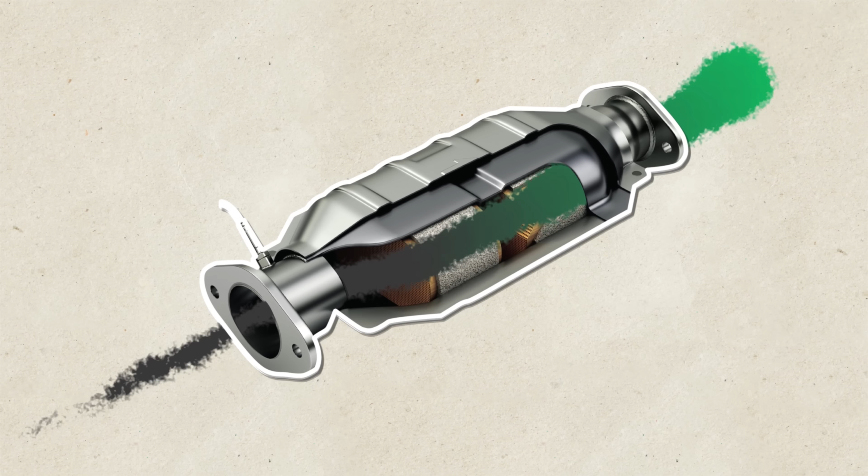It would take another 40 years before engineer Eugene Houdry invented the catalytic converter, which reduced the problem of toxic gases. Later in the video, we'll look at Eugene's story too. Without these two men, noise and air pollution caused by motor vehicles would be much worse than it is today.

Now you're probably aware of the dangers of toxic gases like carbon monoxide that your car releases. But you might consider noise less of a danger. The truth is, noise kills. Loud noise at work and consistent traffic noise makes the risk of heart disease 4 times higher.

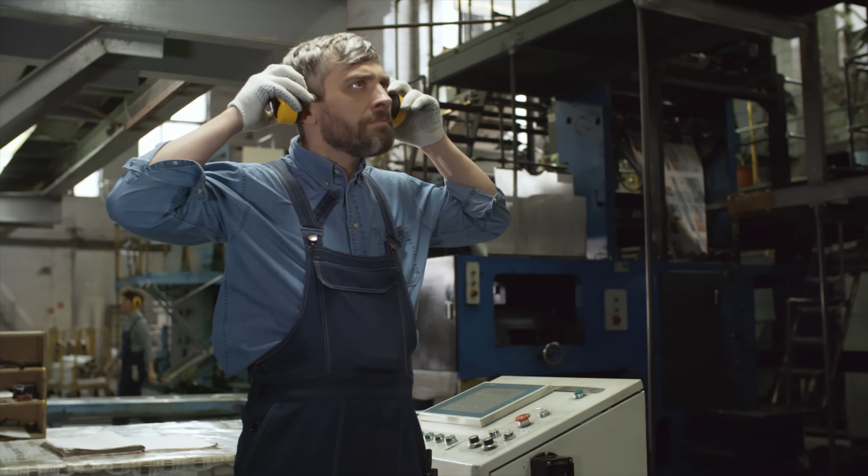This is why protective hearing gear is required by law. It's also why states impose noise regulations. This goes back as far as 1905, when the state of Oregon passed a law that required vehicles to have a light, a muffler, and efficient brakes.

Today, most states don't allow exhaust noise of over 90 decibels. In general, anything over 85 decibels is too high. Normal conversation is around 60 decibels, except for mine, which is a lot louder. A lawnmower is about 90 decibels, and a rock concert gets up to 120 decibels.

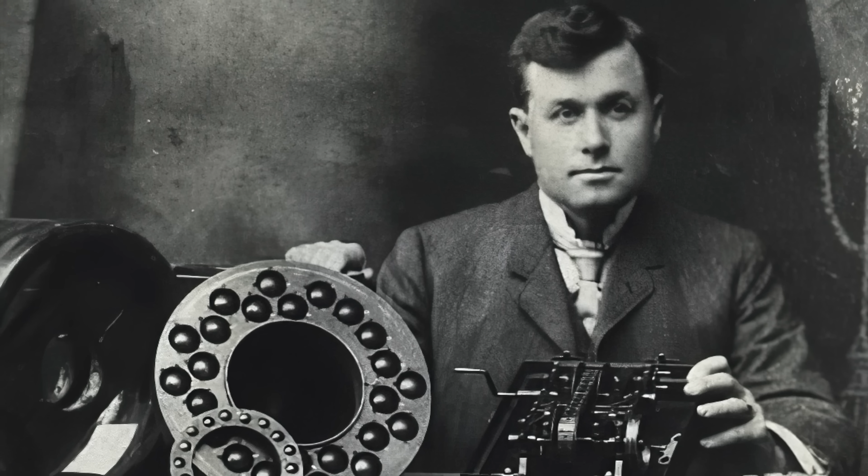Some people can handle loud sounds better than others. I'm guessing Milton Reeves wasn't one of those people. So let's hear the story of how he came up with the muffler. It wasn't just the muffler he invented—we'll take a look at his other inventions too, as well as some of the strange-looking cars he built.

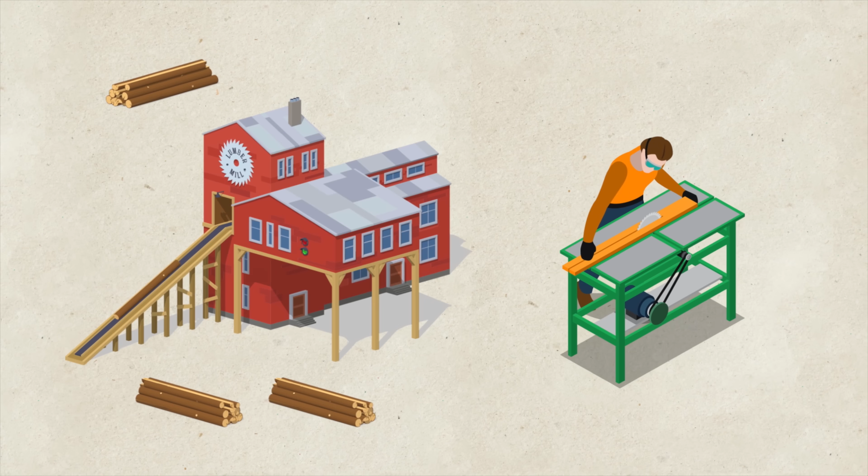It's 1864. Milton Reeves is born on a farm in Rush County, Indiana. At just 15 years old, Milton is working at a sawmill when he notices that the workers can't control the speed of the pulleys used to power the saws. Milton is a perfectionist, so he spends months studying and experimenting until he finally comes up with a solution. He invents variable speed transmissions to control the speed of the pulleys.

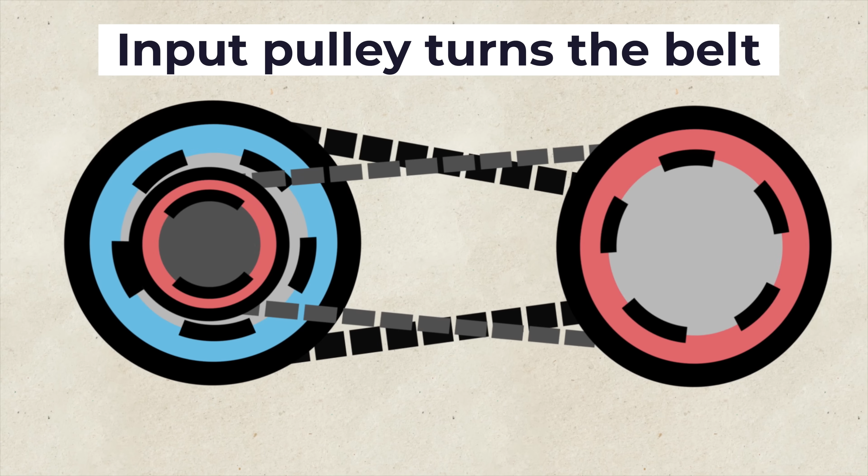Basically, continuous variable speed transmission works by attaching a belt to 2 pulleys. The input pulley turns the belt, which in turn pulls the output pulley. If you adjust the gap between the pulleys, this changes the diameter, which changes the speed of the belt.

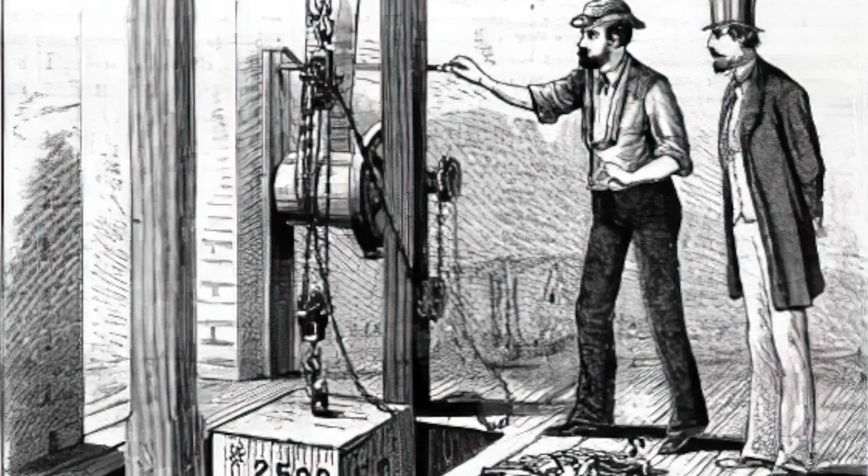This idea is so good that 10 years later, Milton and his brothers purchase a pulley company. By now, Milton is interested in motor vehicles. He uses his belt and pulley-based variable speed transmission on the first 4-wheeled Motocycle that he built. The first recorded test is September 1896, just 4 months after Henry Ford completed his quadricycle in his home workshop in Detroit. Milton's automobile is either the 4th or 5th American automobile built. He believes his vehicle is superior to Henry Ford's quadricycle, which only has 1 speed.

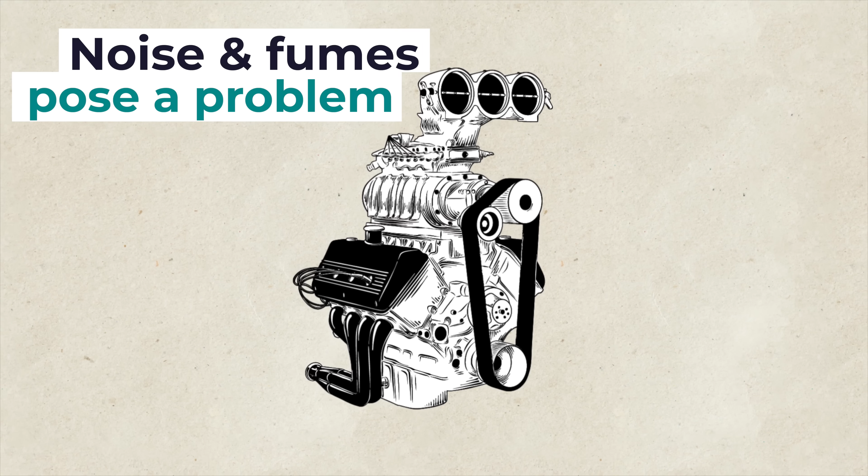But now he finds another problem: the noise and fumes created by the engine. After working on the problem, he invents the muffler.

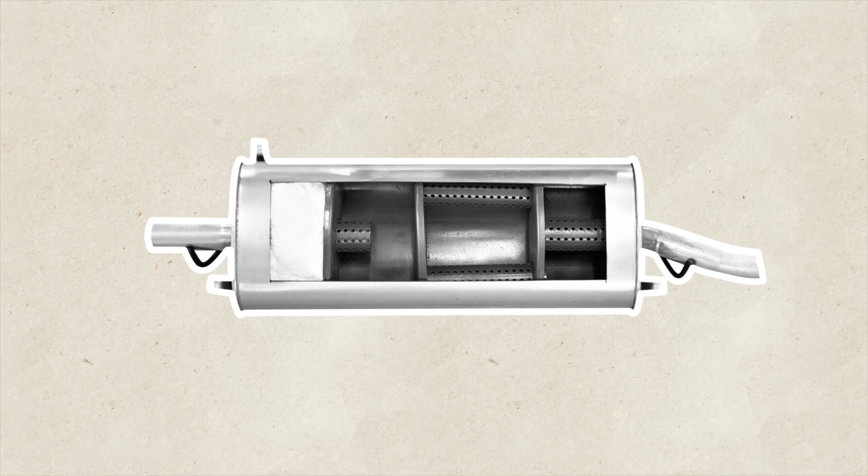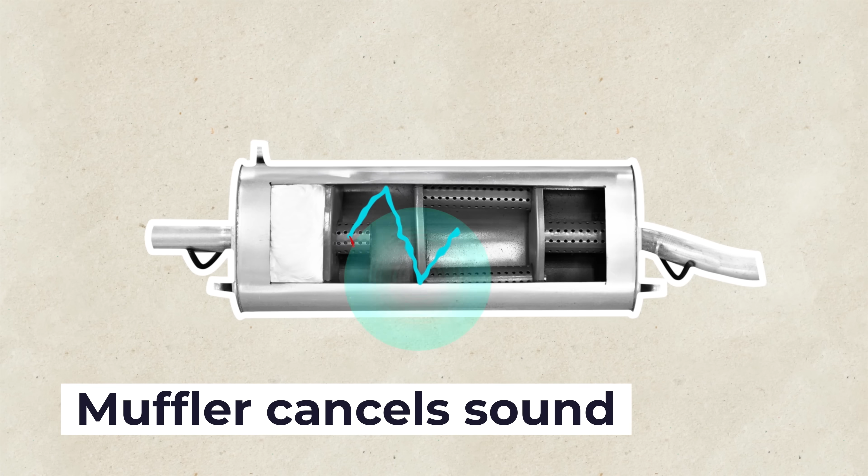Let's take a look inside a muffler to see how it reduces noise. It looks fairly simple, just tubes, holes, and chambers. It's actually as cleverly made as a musical instrument—except a musical instrument is designed to make sound and a muffler is designed to cancel sound. Hence a muffler, muffling something. Most car parts do say what they do.

To understand how it does this, we need to know a bit about sound and how it travels. Sound travels in waves that start from the source of the sound to reach our ear. It's just like the waves you see when you throw a stone into the water. If you throw 2 stones at the same time, the waves interfere with each other. That's exactly what's happening with sound waves.

Sometimes you get constructive interference, which happens when the waves combine together to create a larger wave. This results in a louder sound. But sometimes the waves are out of sync or phase and they cancel each other out. This is called destructive interference, and it reduces or cancels the sound. The muffler reduces the engine noise by reflecting the sound waves in such a way that they cancel each other out.

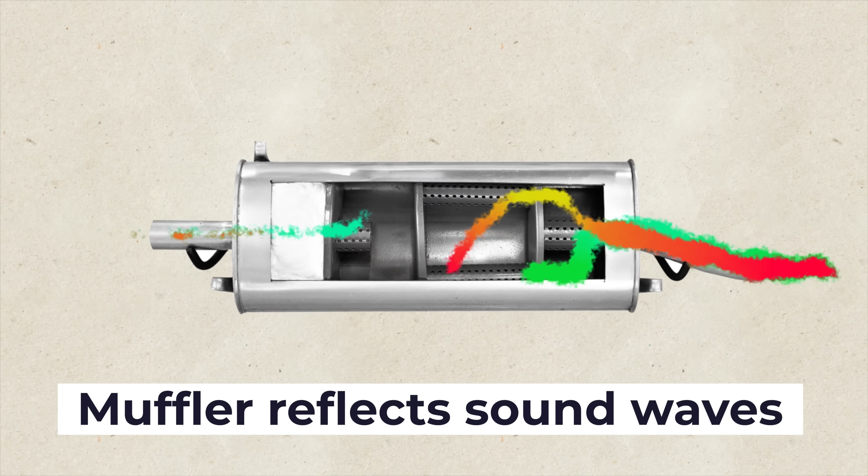In addition to the inner workings of the muffler, it's also constructed from layers of metal that help absorb the sound. The muffler quiets the engine, but it doesn't deal with the fume problems.

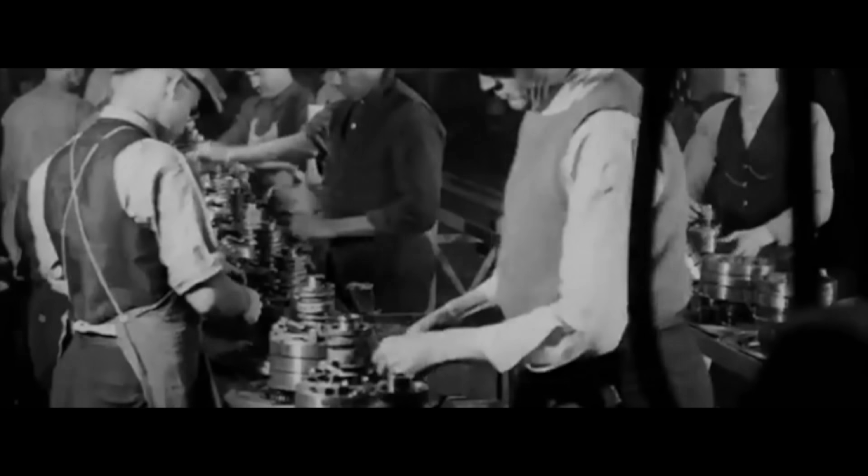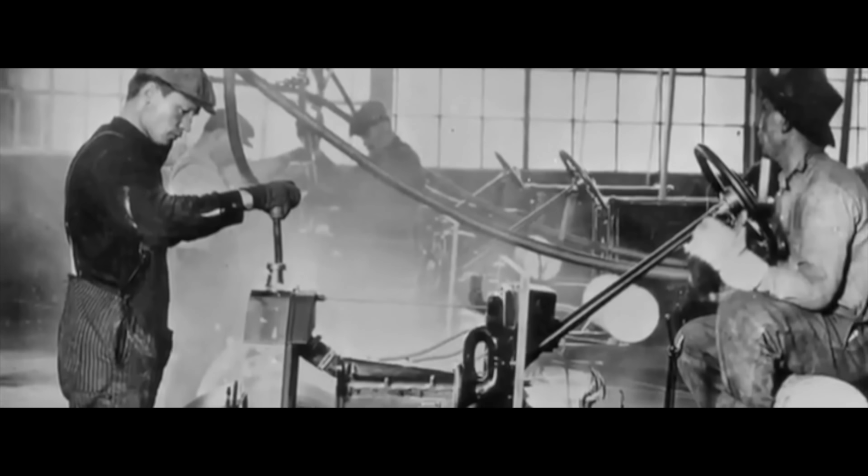So Milton begins working on making improvements to the engine. He looks at cooling and having the intake and outlet manifold on opposite sides. Milton also looks at making the drive smoother over rough roads of those days. He uses additional wheels to improve the vehicle's ability to absorb the shock. Many of his ideas, like twin steering, will be used in the future. Milton is just ahead of his time.

But he's also ahead of his time when it comes to pricing. His cars are engineering masterpieces, but they're just too expensive. Hardly anyone can afford them. The Octo-Auto has 8 wheels and sells for $3,200. The Sexto-Auto with 6 wheels is a whopping $4,500. That would be over $100,000 in today's money.

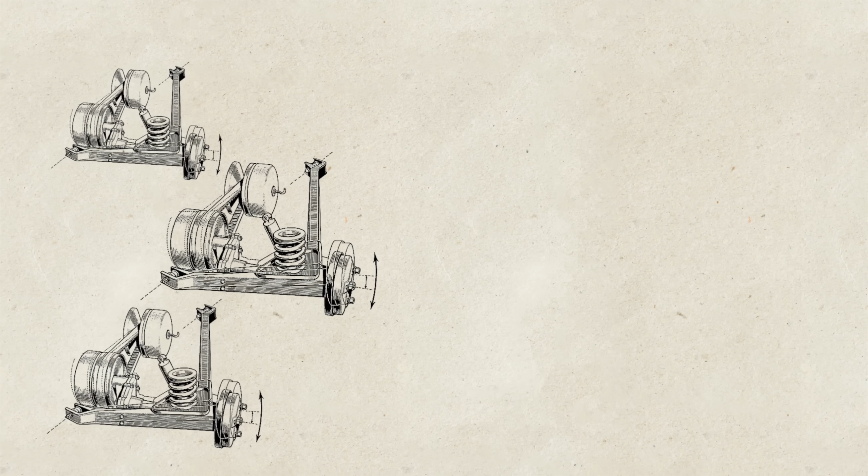But his high-quality work is noticed. The Aero Car Company orders 500 of his engines. Unfortunately, the company collapses. Finally, the Reeves family decides to sell the engine company. They continue to make the variable speed transmission until they also sell the company to Reliance Electric, now part of the Baldor Electric Company. This still leaves the problem of toxic emissions unsolved.

Milton is not the only person to be concerned about it. Back in 1909, a French chemist, Michel Frenkel, talks about needing to add a catalytic agent to the exhaust boxes of motor vehicles. This is just after the Model T Ford goes into production. It will, however, be another 40 years before someone comes up with a solution.

Enter Eugene Houdry, a mechanical engineer born in France. He's interested in high-performance fuels. It's 1931. He can't get financial support to produce new fuels in France, so he moves to New Jersey. Here, American companies support his work on improving fuel performance. It's now World War II.

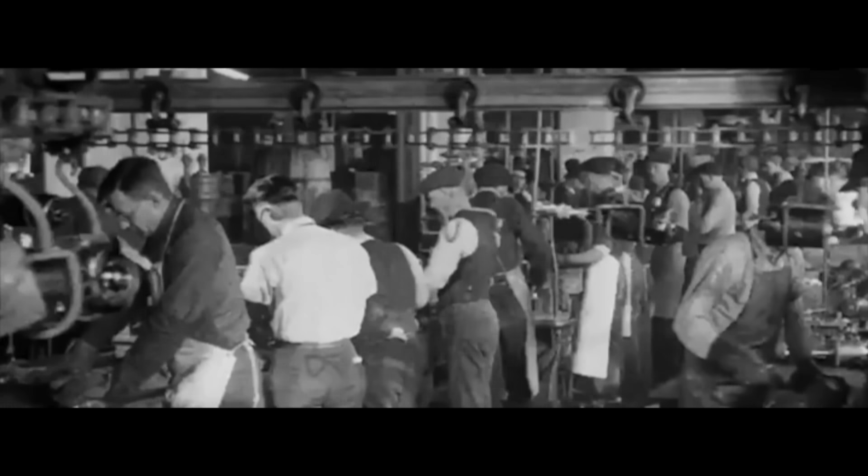Eugene vocally opposes the French government, so he loses his French citizenship. Luckily for him, the U.S. grants him citizenship. Once the war is over, he becomes concerned about the health risks from automobile and industrial air pollution. He builds a generic catalytic converter that reduces carbon monoxide and unburned hydrocarbons from exhausts.

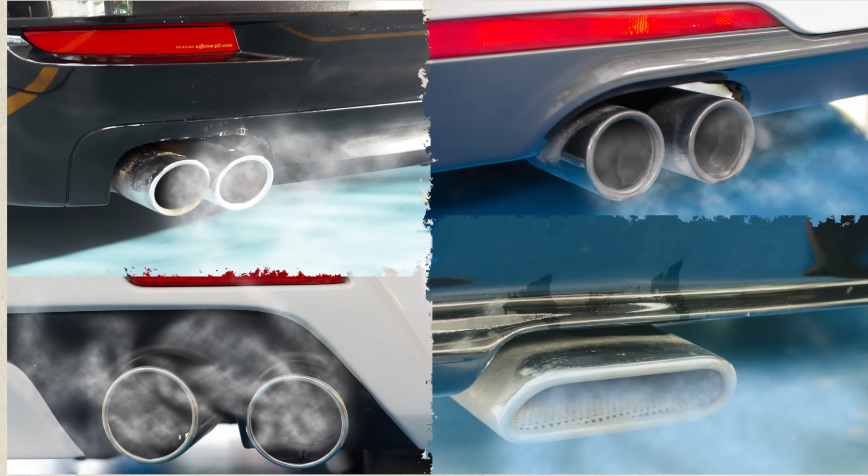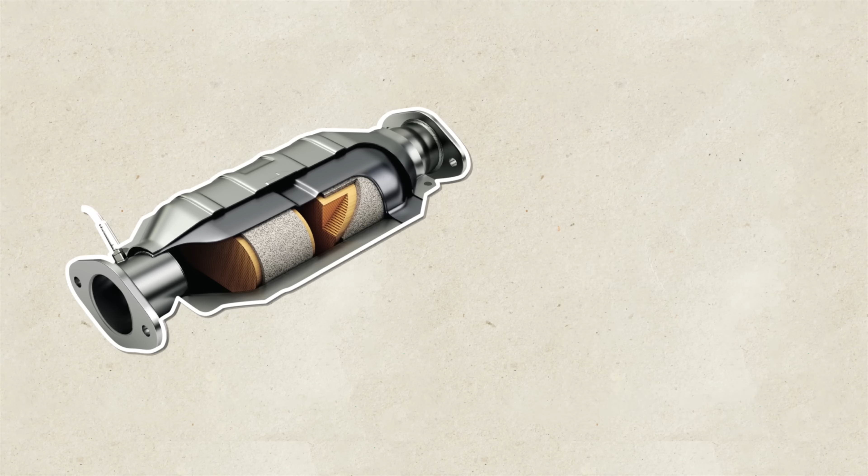Today, the catalytic converter is part of most exhaust systems. Air enters the exhaust manifold, passes through the catalytic converter before it exits through the muffler. The catalytic converter consists of 2 ceramic blocks inside a metal casing. Each block has thousands of ducts coated with a catalyst metal, often palladium or gold. As the gas touches the metal, it reacts, and then recombines into harmless gases.

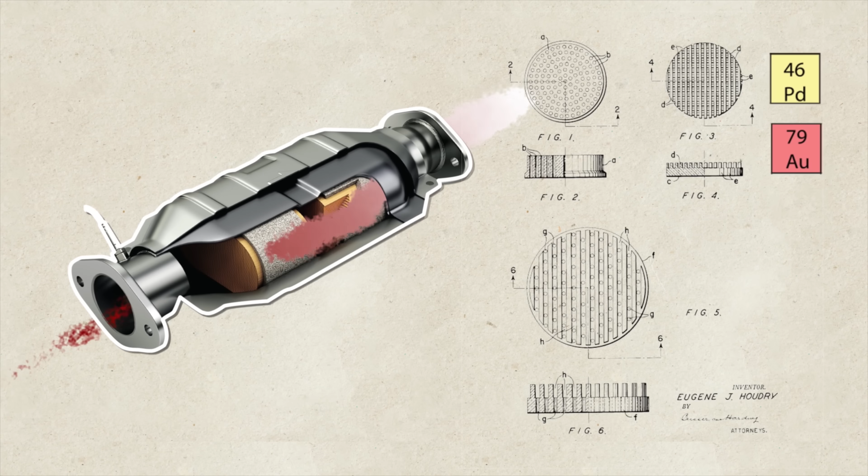The reason there are so many small ducts is to ensure that as much of the gas as possible touches the metal surface. If you combine the surface area of all the ducts on one flat surface, the size would be as big as a football field. Kind of too big to fit in the bottom of your car, huh?

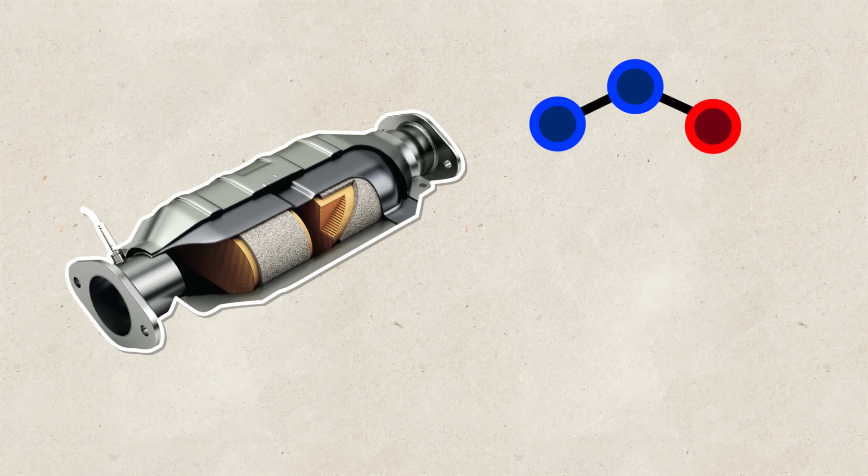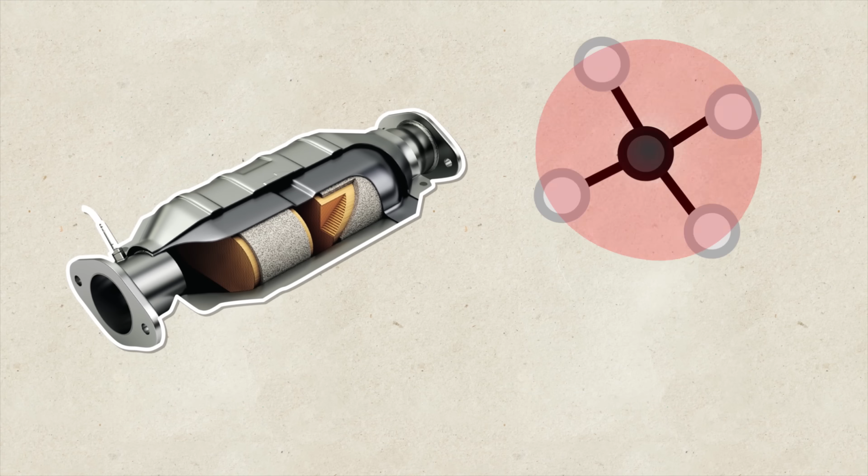One of the ceramic blocks tackles toxic nitrogen oxide. It breaks it up into nitrogen and oxygen, both harmless. The other adds oxygen to the carbon monoxide, turning it into less harmful carbon dioxide. The third takes the unburned hydrocarbon and turns it into carbon dioxide and water. And it does all of this in under a second.

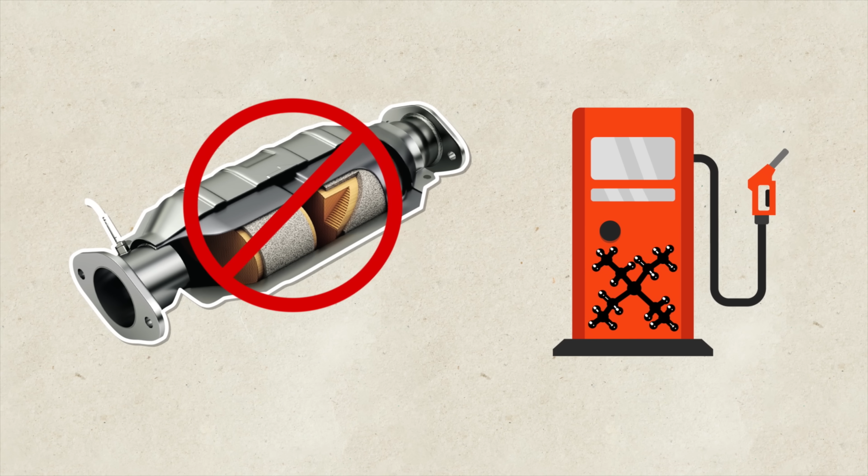The original catalytic converter was patented by Eugene Houdry in 1962, the year in which he died. By 1975, the U.S. introduced regulations forcing its use on cars. The converter doesn't work with leaded fuel, as lead poisons the catalyst. But by the time it was introduced, lead was being eliminated from fuel. Catalytic converters only start working optimally when the engine is really hot, which only happens after a few miles. So they don't eliminate all the gas, but by most estimates, they're about 90% effective.

So that's the story of the exhaust manifold and how the muffler and the catalytic converter work together to reduce noise and toxic gases. Not everyone likes them because they reduce a car's power. And there's no denying that loud, fast cars are a lot of fun. But most of the time, it's probably best that these features are in most modern cars.